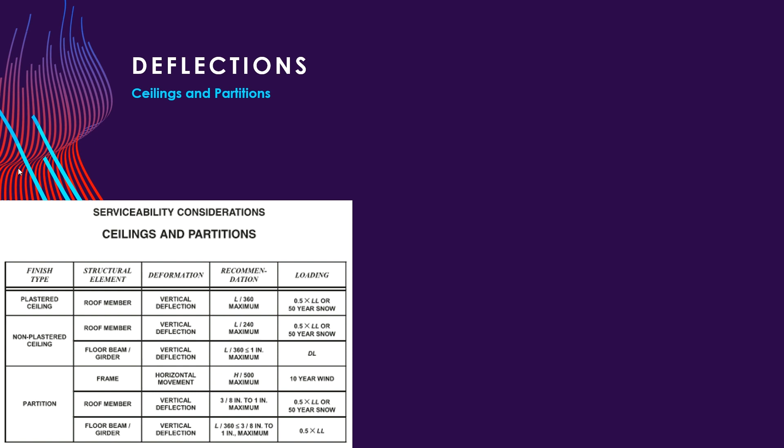All right, let's continue on with our discussion about deflections. So let's look at ceiling and partitions. Well, here's the design guide number 3 criteria, and that's all we've really been talking about so far.

So, but what about the building code? Well, the building code has its own criteria, and the building code is not optional. We have to follow that criteria.

You can see there's a lot of similarities between these two tables, but there are some differences. Let's set a baseline first. So supporting non-plaster ceilings is drywall, and also with other brittle finishes is also talking about drywall.

All right, so then there's these superscripts in the code. Superscript F says, hey, you can multiply your wind by 0.42. Well, in the previous example, we talked about where that came from, and the example I came up with, it was 0.44, but very similar. This is a conversion from LRFD to ASD and converting from a 50-year wind to a 10-year wind.

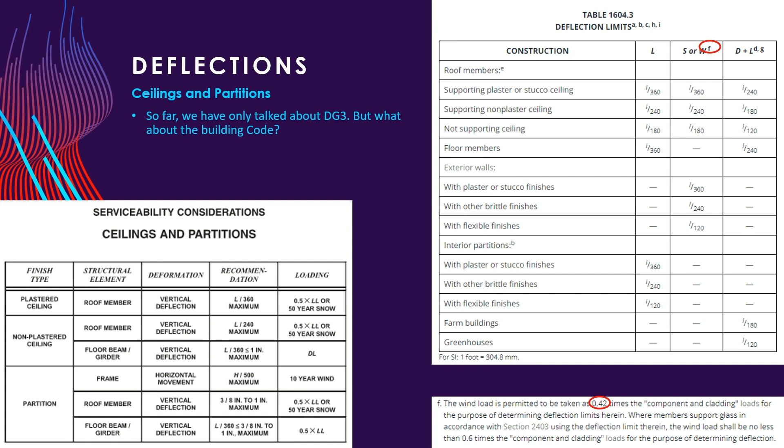And then the superscript D and G. So D has to do with dead for creep-susceptible materials such as wood and concrete. But then there's this superscript G, which says for steel members, dead load shall be taken as 0, and that's because there's no creep in steel.

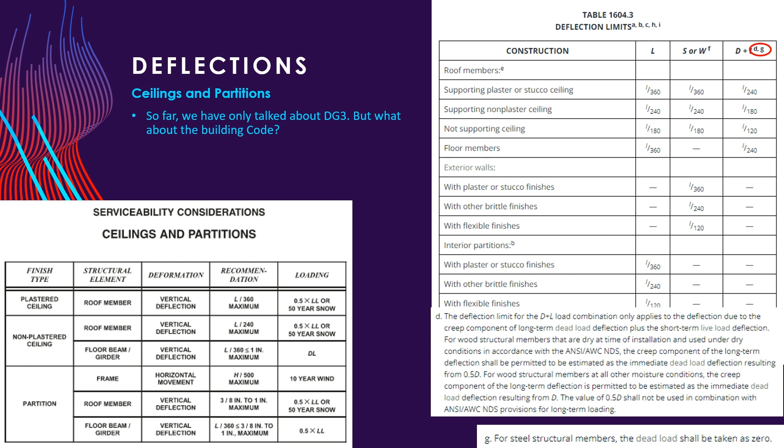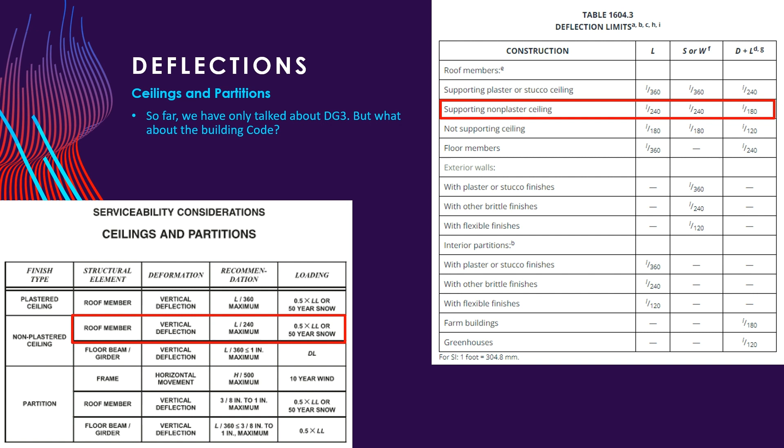All right, well, let's look at a couple of the differences. So both of these are the same member, supporting a non-plastered ceiling, say a roof member. The design guide number 3 has a deflection of 240 and the code has 240, but DG3 says half live load where the code says full live load. Well, the code controls, so we're going to use that.

And then for floor beams, the design guide number 3 says deflection of L over 360 or 1 inch maximum, but there's no such criteria in the IBC. It says we're going to look at live load, no, we're not going to take into account dead load. So, yeah, 2 different criteria. You really should hit both.

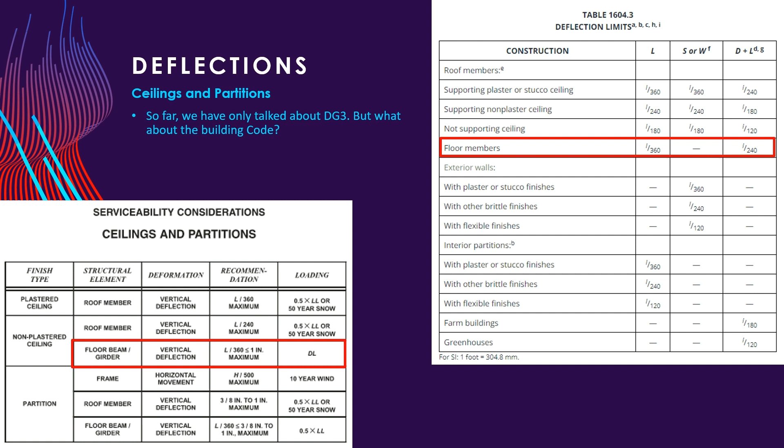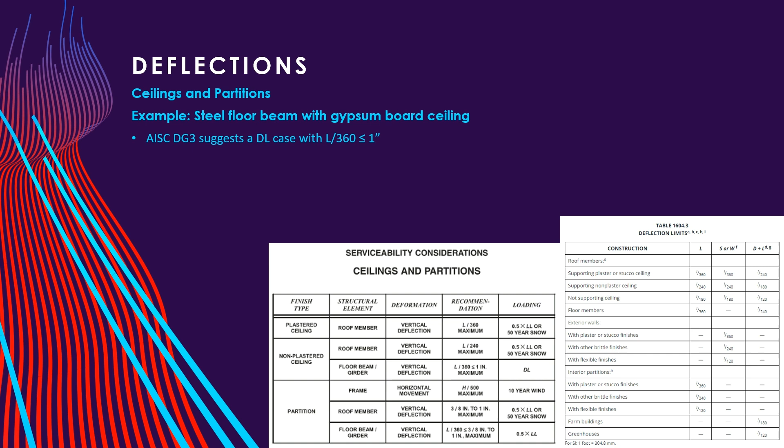So let's just do an example. If we have a steel floor beam with a gypsum board ceiling, design guide number 3 suggests a dead load case with L over 360 or less than 1 inch. And IBC requires a live load case with L over 360. The dead plus live case of 240 won't control because dead is 0, so that last column on the right is just going to go away.

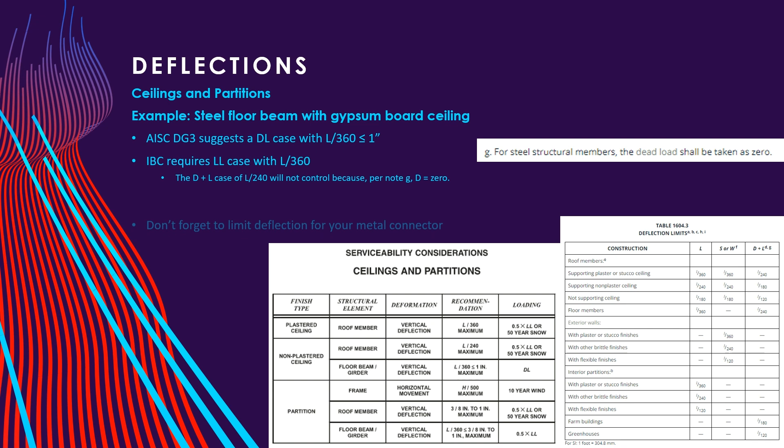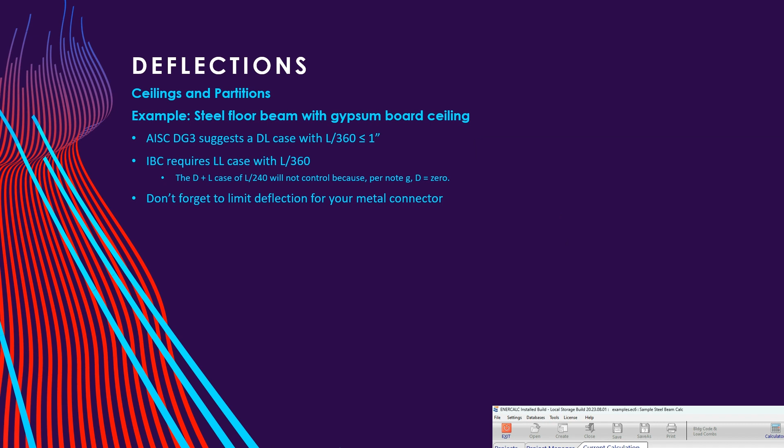And then we can't forget about limiting our deflections to what our metal connectors can handle. All right, so with all that said, there's a lot of criteria there put out by the design guide and the code, but the commercial software doesn't really capture it very well.

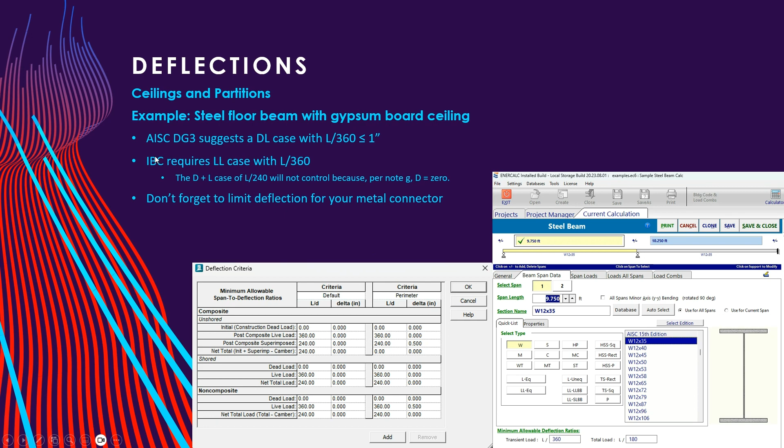Now here's a RAM structural system. Its defaults are very similar to EnerCalc, right? I have the one on the right says perimeter. I put that in manually, but you have to pay attention that the commercial softwares, the defaults, don't hit all the criteria exactly correct.

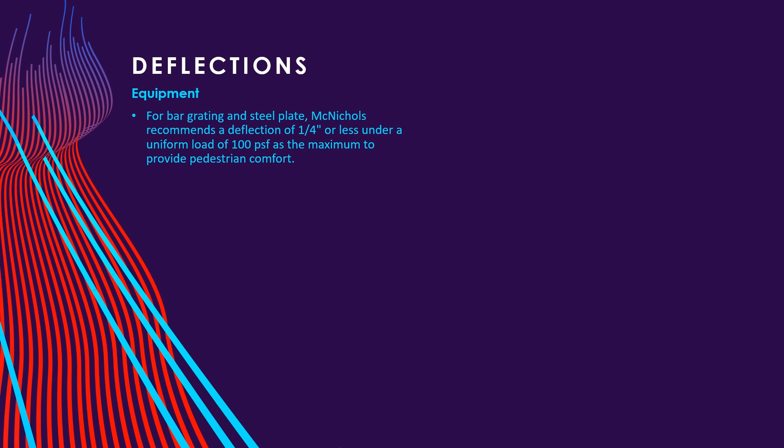Let's talk about equipment for a minute here, bar grating and steel plate. McNichols, which is a manufacturer of metal grating, recommends a deflection of 1/4 inch or less under a uniform live load of 100 psf to provide pedestrian comfort. So, yeah, I mean, if you're walking on a steel plate or bar grating and that thing starts to buckle or make sounds underneath your feet, I think you're going to be uncomfortable. So they're just suggesting a 1/4 inch or less.

Elevators have a drift of H over 500. One of the things the wood industry is really pushing is let's get rid of the masonry on projects and go with wood shafts. That's all well and good, but without masonry stair shafts and elevator shafts, it may be difficult to achieve that H over 500 with the amount of openings that architects like to put in there, and the mechanical equipment also needs openings. So you've got to pay attention that H over 500 can be limiting on wood.

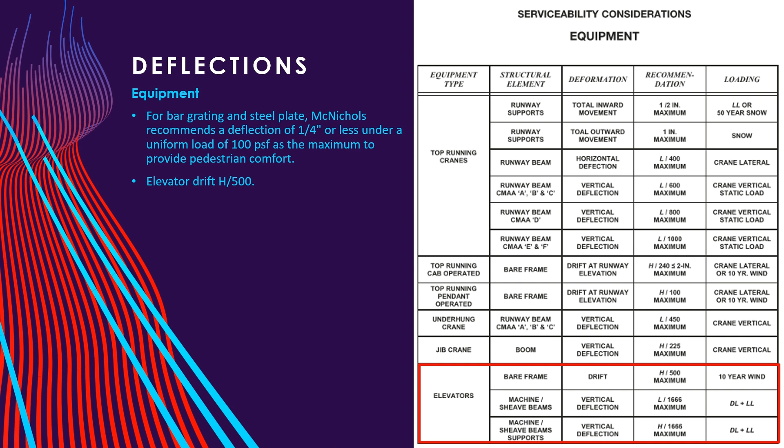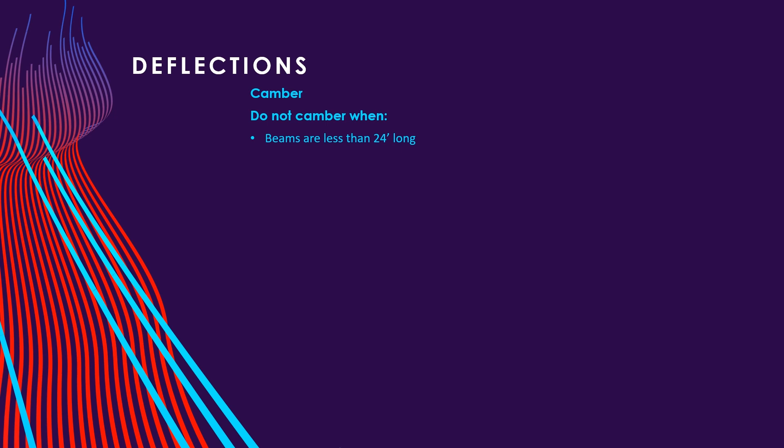Let's talk about camber for a minute. Don't camber when, and this all comes from AISC recommendations, the beams are less than 24 feet long. The jig that they put things in can't handle short members. So beams that have web thicknesses less than or equal to a quarter of an inch on spandrel beams, this is exterior or interior beams. Maybe on the interior you have a stair opening and there's a spandrel that crosses the middle. You don't want to put camber on those.

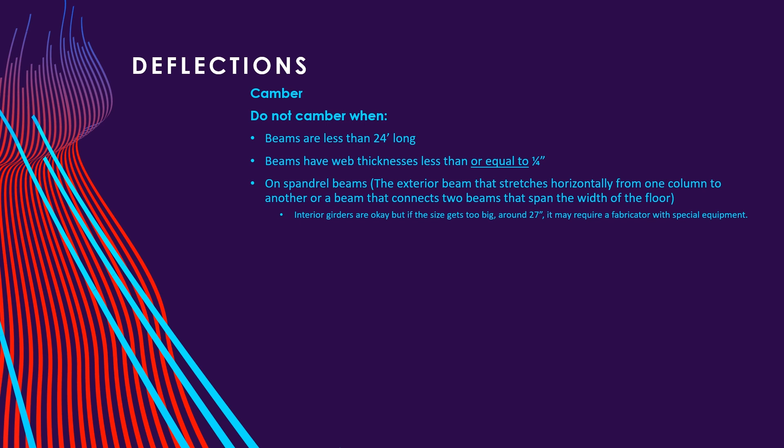Interior girders are okay, but if the size gets too big, around 27 inches, then it needs a special jig. It can be done, but you want to check your local supplier. 27 inches is about the time you need to ask, hey, can I do anything bigger than this?

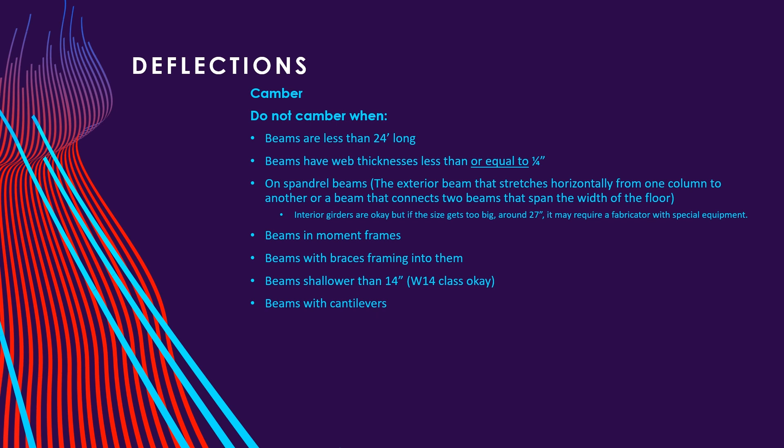Beams in moment frames, beams with braces framing into them, like a K brace or whatever, you can't just camber those. There is no deflection on braced frames. So beams shallower than 14 inches, a W14 class, is okay. Beams with cantilevers, beams with non-uniform cross sections, beams with significant non-symmetric loading, beams subject to significant twist, should not be cambered.

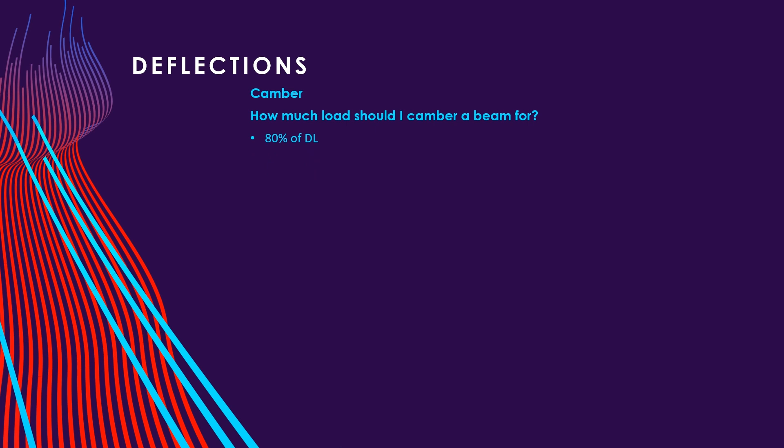So how much load should you camber a beam for? Well, 80% of the dead load is what they recommend.

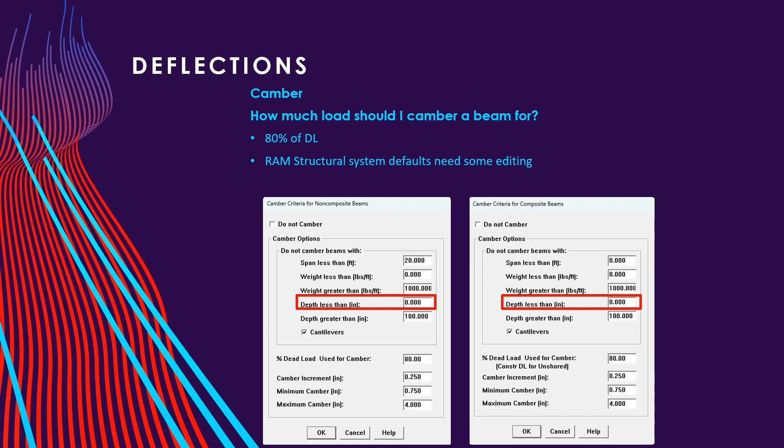Now, what about equipment mezzanines without oscillating equipment? They have no drywall underneath them. So what kind of deflection criteria are we going to use on those?

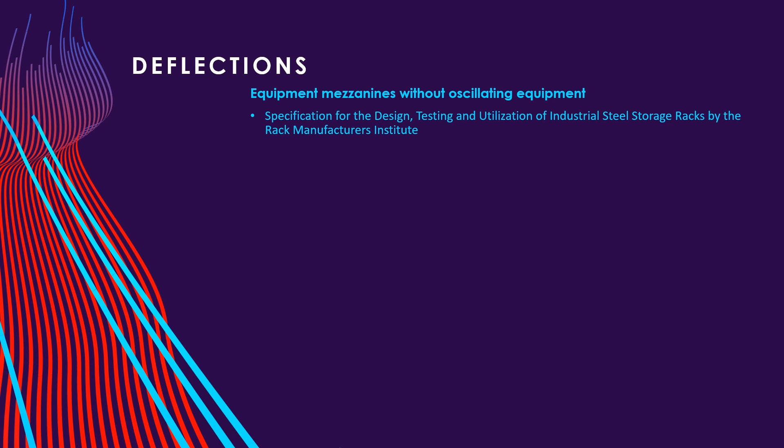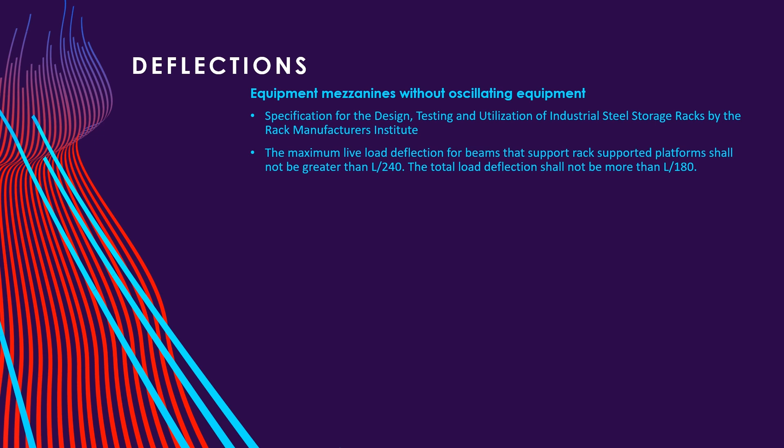The Rack Manufacturers Institute says, let's take a live load deflection not greater than 240, and a total deflection not more than 180. And then, interestingly enough, what's the horizontal deflection? Notice the title here, equipment mezzanine, people can get up there.

If you're in an interior mezzanine and there's no wind load to speak of, and in low seismic zones, what are you going to do to put a horizontal kind of constraint on this whole system? Well, the Rack Manufacturers Institute says, let's apply a 350-pound side force.

So if you take that 350-pound side force, and that's, of course, if you're loading it with a fork truck or something, then you have to design it the way it says here. And interestingly enough, the 1997 UBC had a deflection limit of H over 278, where you didn't have to do a P-delta check.

So one school of thought is to take that 350-pound point load, which is arbitrary, and whatever deflection you get, hold that to a deflection of H over 278. That's a way of going. At least it's something, right? It's somewhere to start. But I recommend a horizontal drift limit of H over 200 under this load case of dead plus omega, where omega is 1,000 pounds.

And honestly, this is just something I produced. It's based on experience. If you do the former criteria with the 350-pound load combined with the H over 278 criteria, sometimes people say, hey, this thing's kind of wiggly. So if you put 1,000 pounds on these little mezzanines, that takes that wiggle out of there, and then you get less complaints.

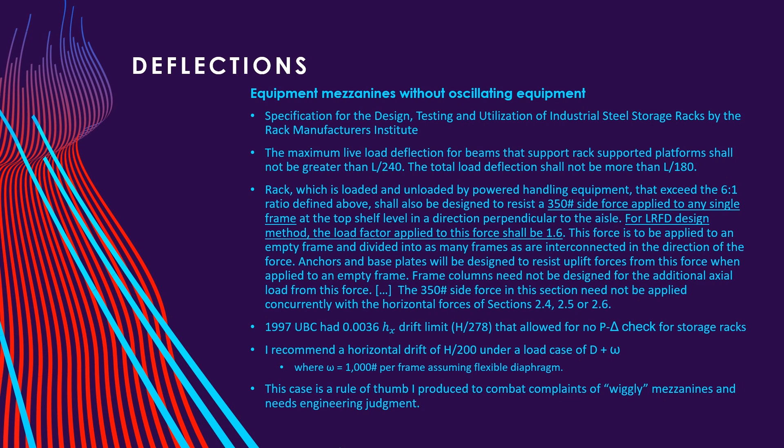But with that said, you've got to use engineering judgment. Sometimes there's other things going on, it's really, really small, and you don't really care about that wiggle. So use your judgment.